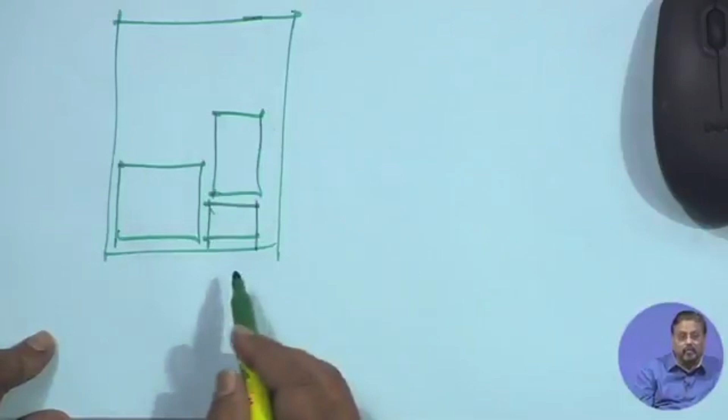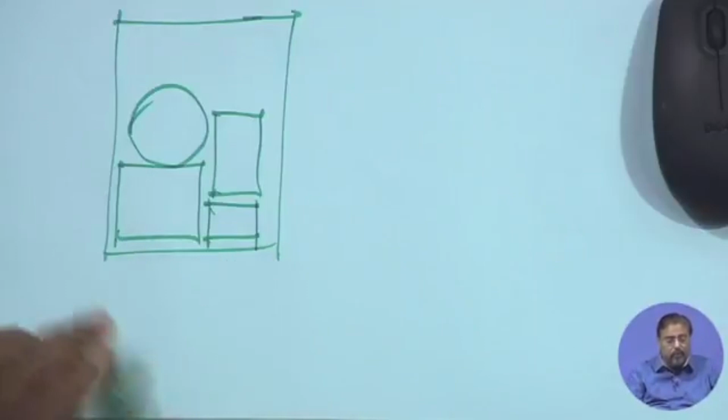It is something like, again, I will try to draw. Suppose in the whole landscape site, you have one area which is very large, and another space which is very small, and a space which is rectilinear like this, and a space which is circular. I am trying to give different kinds of forms to make my point clear. Whenever you see this, you have a feeling that they are not properly balanced in terms of their sizes. Again, the balance here I may not discuss in terms of the form and the objects.

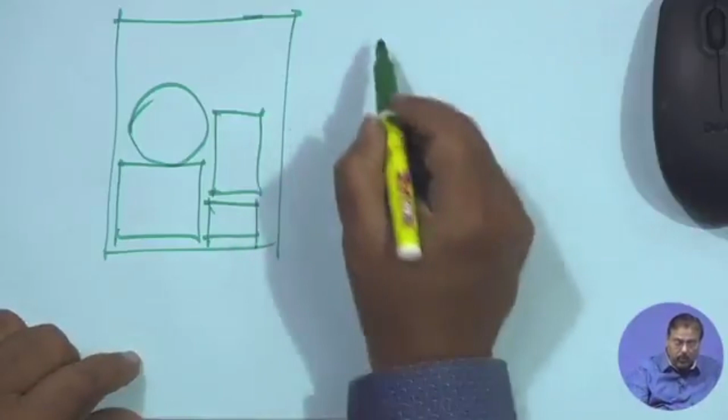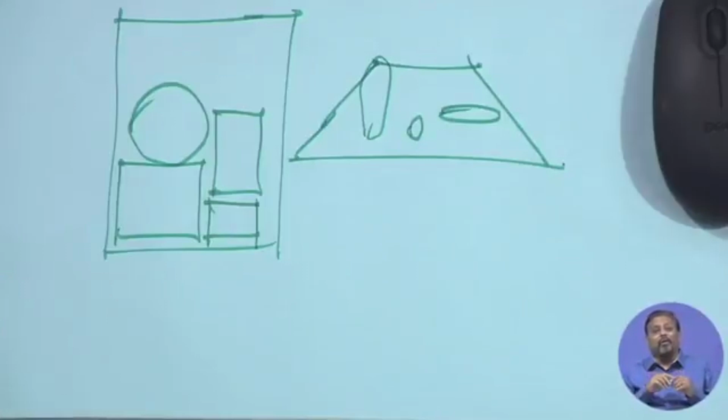Even the balance, say in my landscape, if I have a landscape drawn in perspective, I have one object very large, another object small, another prostrate kind - they are not balanced. Why are they not balanced? Because whenever you are looking at each of them and ultimately trying to make a comprehensive or cumulative idea in your mind, you find one is great, one is big, one is large, one is small, one is drooping.

This is what is the balance part of it. When we think it is balanced, every element is different, but in terms of scale, form, color, and harmony, they fairly appear to be in place. We did not put this as abstract, because here the mind starts setting some dimensions to it - that is why it is not abstract. Abstract are those which are non-dimensional, but here it has some dimension in it.

The occult balance is where there is a little bit of deviation from the normal balance you have done, but yet the effect has been very good. The balance is when the mind tries to understand whether everything is balanced and feels pleasure. Occult balance is not everything being balanced - it's slightly differing or deviating from the balance, but still looking good. This is where occult balance should be construed.

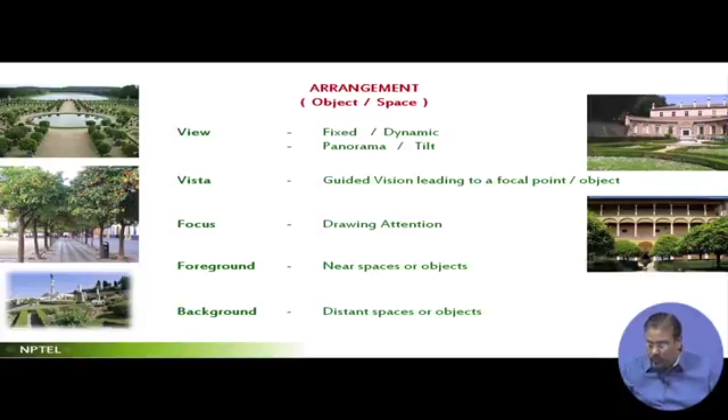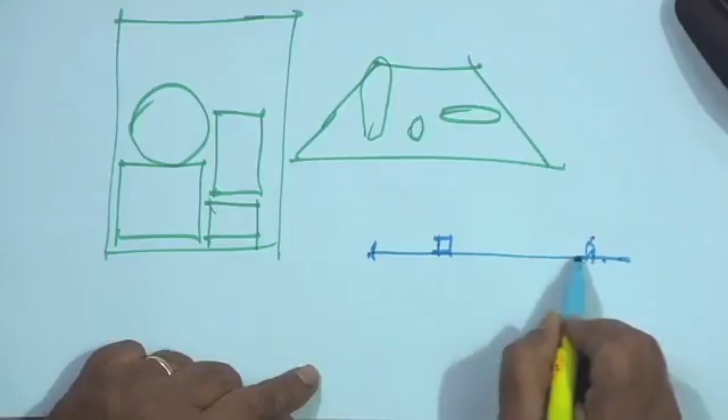One is foreground. Foreground is the near space from an object. Let me give an example with respect to this sketch. Please look at my paper, I am drawing a section first. Suppose you are standing here and you have an object here, with your property from here to here. Anything at the back which you are seeing in the picture, with the horizon line and this object, is what you are seeing.

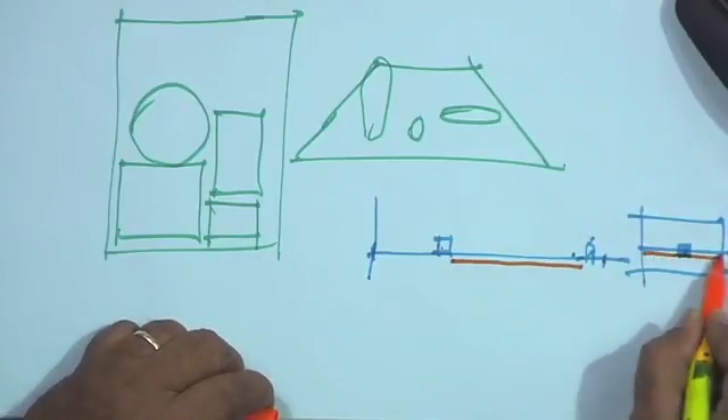This zone towards the front, this zone, is the foreground, and this zone at the back is the background. Now, interestingly, in a view frame, when you look at it, you will find there is a foreground and a background, and everything has a foreground and a background.

Foreground has a limit of visibility; it starts from a reference object to yourself. This portion is the foreground, starting from the reference object. If you shift to another reference object, foreground does not include anything behind you, never. But background is very interesting.

Background starts from the reference object and goes backward. Where does it limit to? The horizon. This is the real challenge in our landscape design.

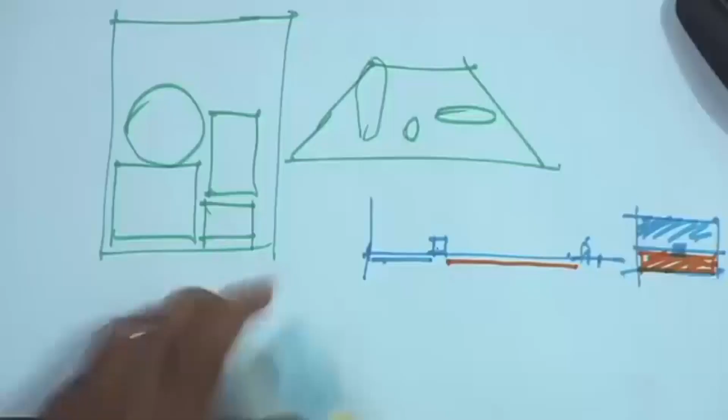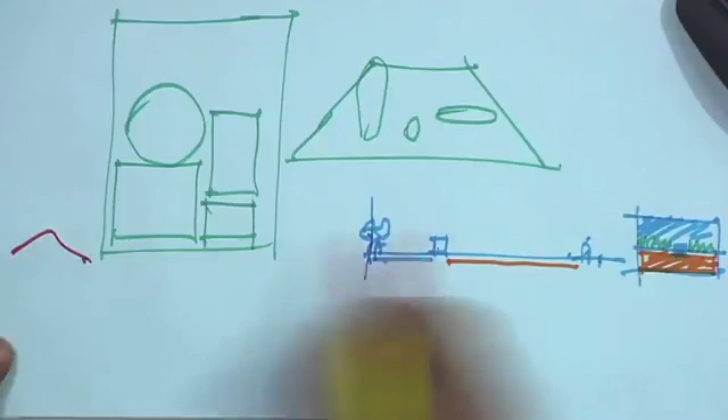Here I have drawn a line. Let's say I did not give any barricade or fence here, it is open. I have given some trees over here. When I see this, I will see the trees in my picture, but has it stopped my vision of the cloud or sky behind? No. Has it stopped the vision of something far away, several kilometers away, like a hill? No. This is the real interesting part of foreground and background.

Let me reiterate: standing from a particular point, as an observer, take a reference object. From that object to yourself is the foreground, not behind you. From that object, anything behind is the background till the horizon, and that makes sense.

All objects, every space or object, when you are viewing it, you are always seeing it against some background, and you don't have much control over the background.

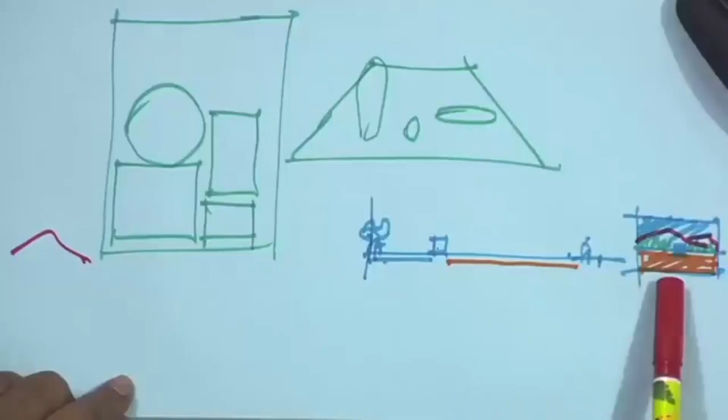Example, the sky. Look at this picture on my paper, a very simple picture. This sky, when it is not cloudy, very shining, then anything you see in front is again a shining background. When it is very cloudy, it's a gray background. When there are cumulonimbus clouds, it's a very dark gray background. If you find blue sky with sporadic white clouds, that's a different background.

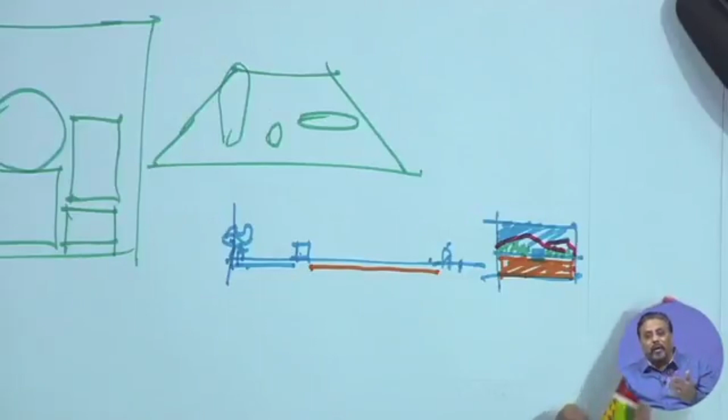So your background is always beyond your control, and that contributes greatly to the expression or experience of your project site, but yet you do not have any control over it.

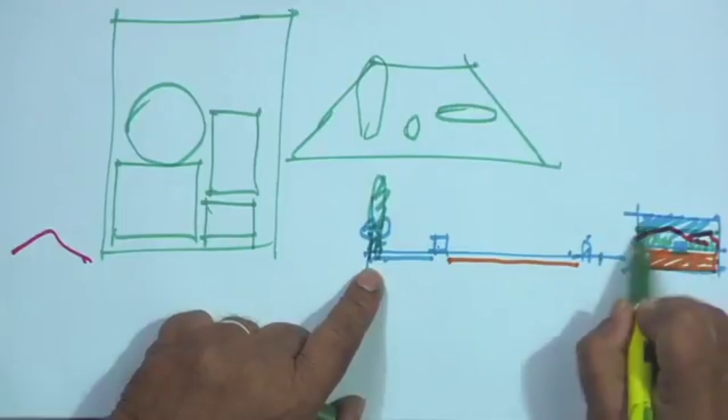If you really want to control it, you can raise the vertical limits up to a height so that the object you have planned at the backdrop negates the effect of the rest. For example, if you make tall tree groves at the end, such that standing at this point you almost do not have visibility of the hill at the back, you have stopped it.

That is where you can do such things, but there is a limit. Up to what height can you go for the tree, or how do you really work it out?

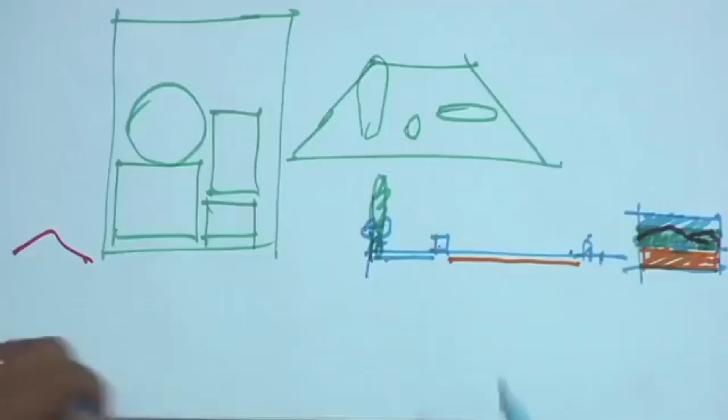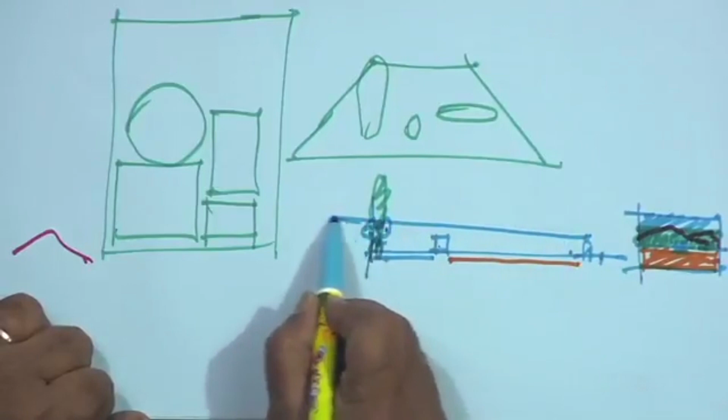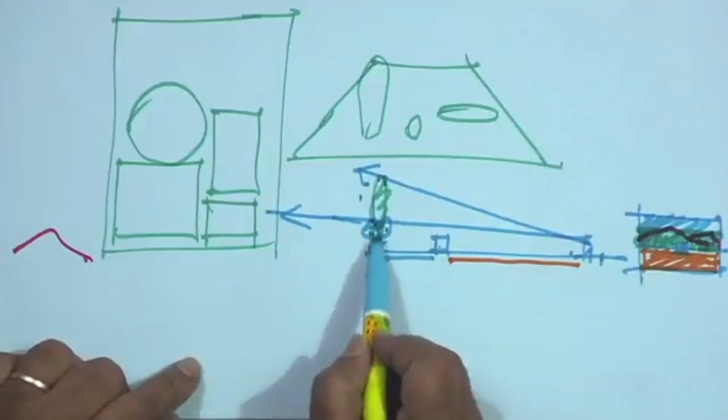A very interesting way of working on this: take this particular line and whatever backdrop object you have, draw a line like this. If the object at the back has very different scales, and if it's visible between this and this point in your picture, it should be included. You decide this height based on your view line. Stand at this particular point, raise the view line up till it reaches the tip of that obstruction, and beyond this, whatever it is, I do not see.

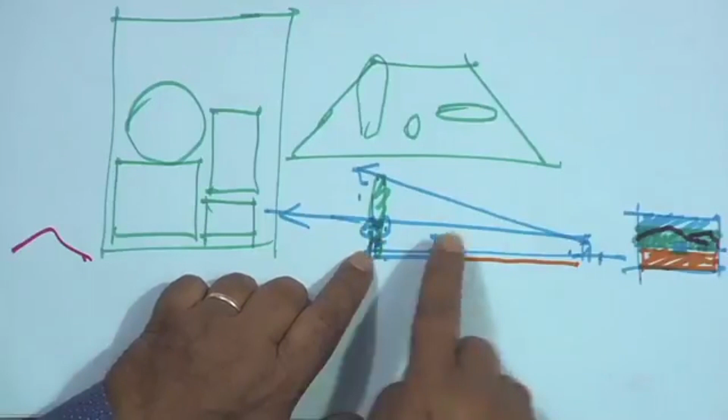That is how you can make a backdrop as per your own choice, but otherwise I always prefer one thing in my landscape. First, I will not go into this kind of complex design. I will first try to see whatever is at the backdrop and exploit it, explore it. If the backdrop becomes good, I will do very little here and allow this object to be seen against that background. So background planning and foreground planning are very essential exercises the landscapist has to do.

If you go back to French and other landscape designs, when I discuss this I will go to a panel, a series of palette of pictures. All these discussions I am doing are just to express what I would like you to know. When I go to a palette of pictures, there will be multiple pictures in the same slide, and I will try to say this is what it is, this is where it is, this is what it is.

Next, order, sequence and transition. This particular set I have clustered together for a very definite reason. When you are arranging your spaces and allowing a user to experience it, these three things matter a lot. Order is placement, how you place it. Sequence is exposure, how you make the movement expose through movement. Transition is exposure from one to the other.

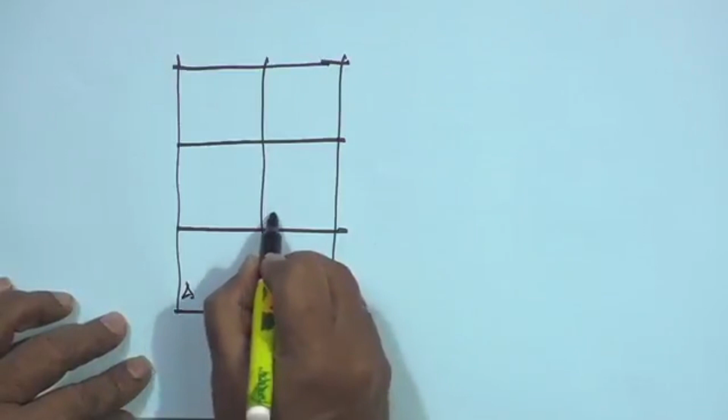Let me draw one sketch. This is a schematic diagram to give the idea. I'll draw a very simple diagram: Zone A, B, C, D, E and F. Say this is a landscape project I am designing, divided into six segments. In terms of a French landscape example, six parterres: A, B, C, D, E, F. For discussion's sake, let me add some conditions. The arrangement or treatment of A is not the same as B. Rather, each of them has their unique arrangement and components. This is what order is. I have ordered them as is, and the order is regular, very regular.

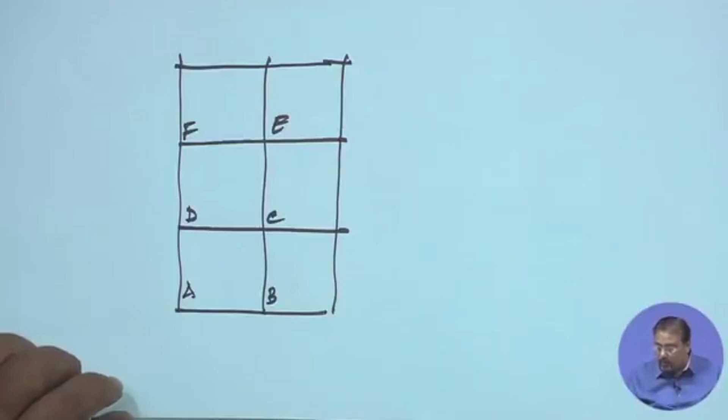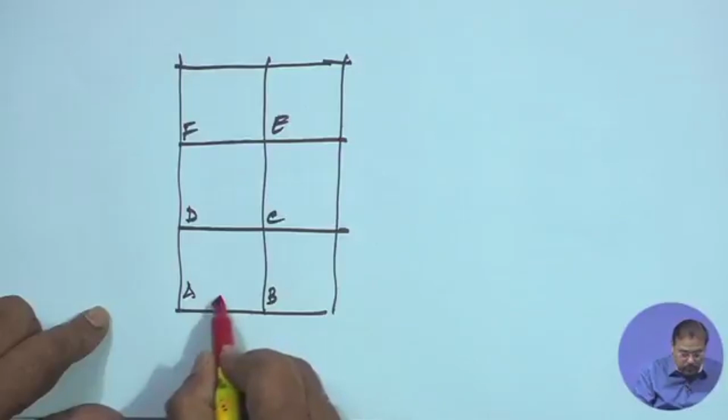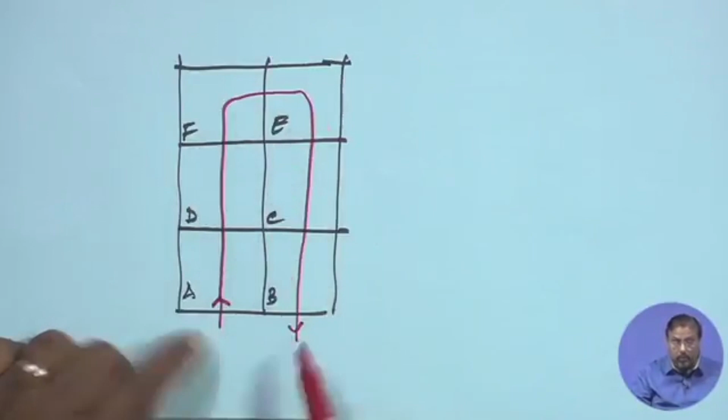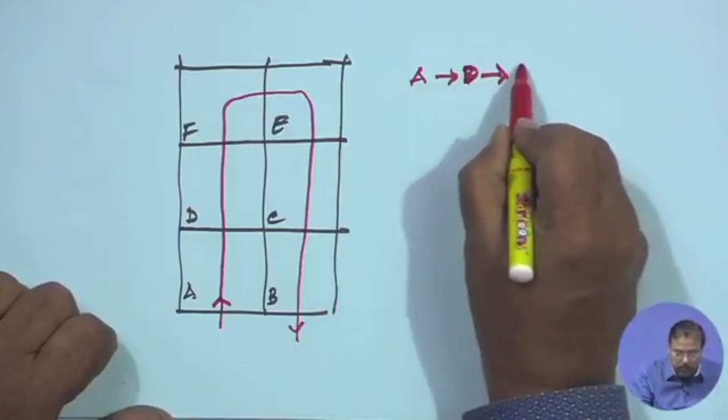Then comes the question of how to see it. Here lies one point: when somebody is seeing it, I will force him to see the way I want. Make him enter and follow these lines. A viewer enters from here, goes to the next, to the next, to the next, to the next, to the next, and then ultimately comes out. If I record this, I have, as per design, sequenced it as A, then D, then F, then E, then C, then B. Be attentive to this.

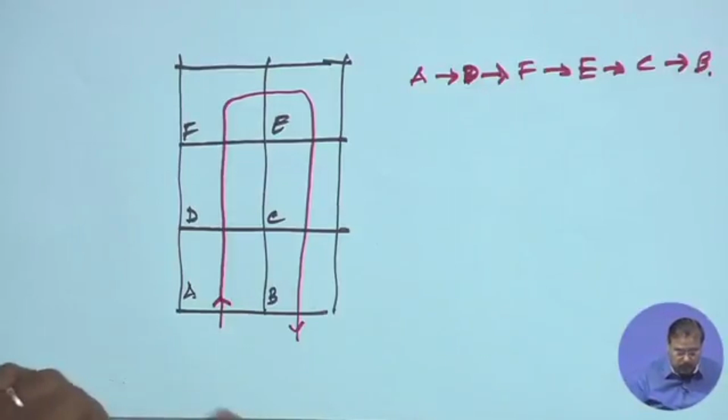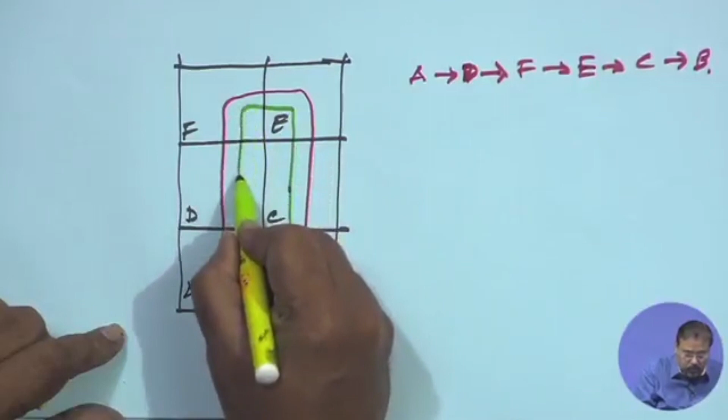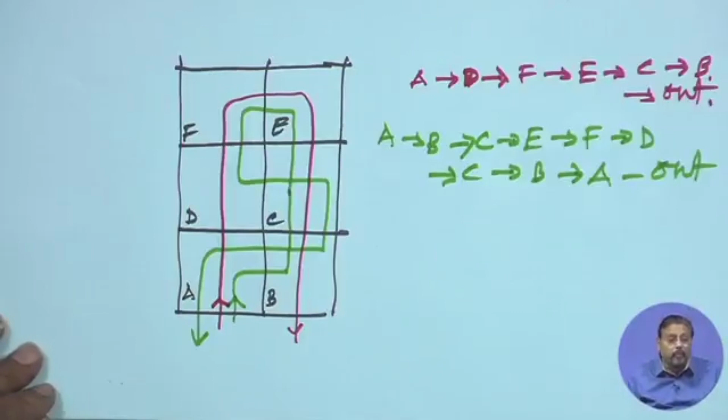This matters - look at this. He enters from here, goes to A, looks at this, then goes forward. Same kinesthetic experience, knows nothing about B. Goes to D, experiences it, goes further, experiences this, turns, experiences this edge, then goes to E, experiences this edge, then comes to C, turns, experiences the E, comes to C, experiences this, then comes to B, and then after that, out.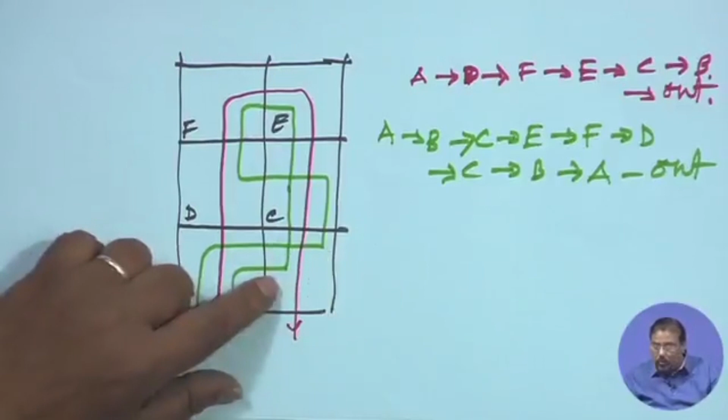Next option, green one, goes to A. A experiences this entirety, turns to this, sees this, goes to this part, sees this, then goes to this part, experiences this, goes straight, experiences C, then E, experiences this, then turns left, experiences this, then F, turns in this direction, experiences this, comes here, experiences this, turns to the left, sees this, then to C, this one, then to B, this one, then back to A, seeing this.

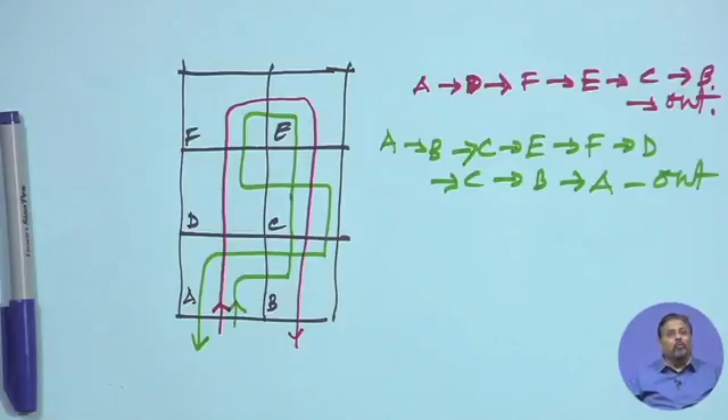Now, this picture, if you just download whatever sketch I have drawn, and try to put your figures, objects and elements within it, try to see, will you have the same experience? No, absolutely different experience you will have. I will tell you how it is different.

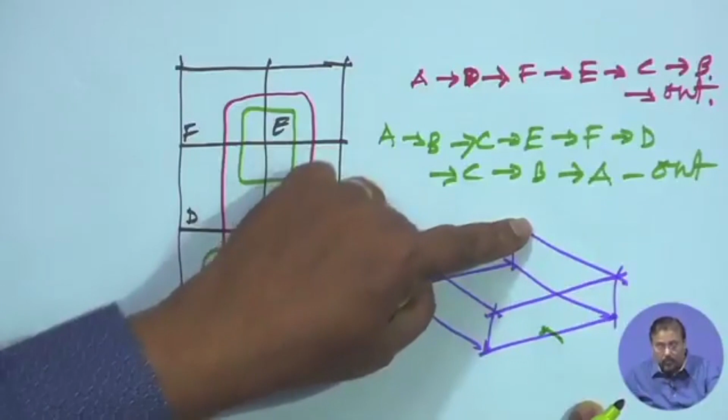See, first of all, in a space, I am drawing it in 3D. Try to understand this, and then when you mentally work it out, try to follow these rules. Once you have come into this particular point, when you see this, you are seeing the rest of the things. You are seeing the other two sides as the side view, and the frontal view of this as the front view, side view and front view.

If you go farther forward, this you have never seen in detail. Also, you have never seen this in detail. You came straight from here to enter through this. After that, when you go straight forward - I am talking about the red line - you saw these two lines as a perspective view, never a perpendicular view, and this one as a perpendicular object, a perpendicular wall. Whatever treatment it is there, this is registered, the other two remain registered.

Take the example of the Granada or Spanish landscape. You remember that fountain? On the left hand side we have the arcades, on the right hand side we have the vegetation, in the front we have the baradari or the king's palace, and then in front you have the water and the fountains. Just take that particular picture - if you would have been looking from this to the arcades, you would have seen the total arcades. You would have lost the effect of the baradari and the entry, and of course the vegetation. This is how you look at it.

So, when you go into this, if you could count or register or record the experiences of the person, you would see that A to D to F to E to C to B is one experience. Take a cumulative experience - this, when you finally add it up, somebody will express in some manner. Then, if you take the red one, A to B, and the green one, A to B to C to E to F to D to C to B to A - cumulative. A he has entered twice, C he has entered twice, B he has entered twice, but he is looking in a different direction. Since he is looking in a different direction, reaction is also different, registration is also different, retrieval is also different. So when it differs so much, his cumulative reactions to the entire spaces are different.

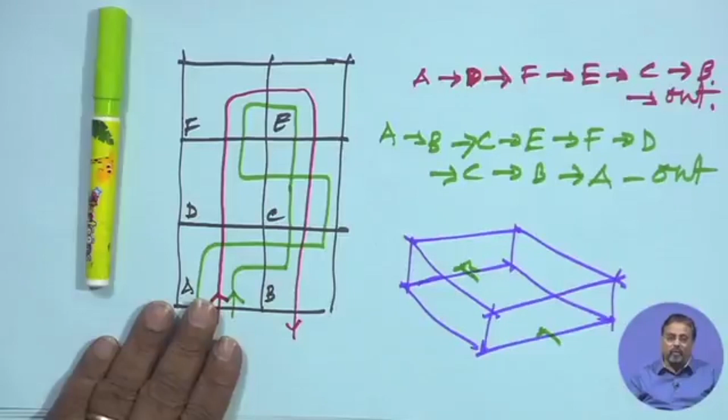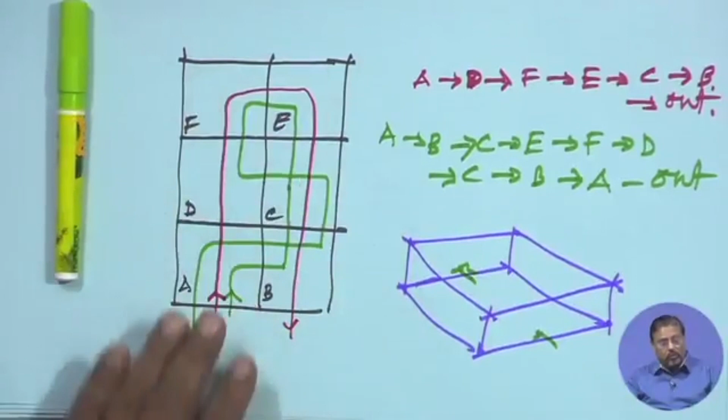Enjoy it. Meanwhile, draw this picture on your piece of paper. My advice is to draw this picture and try to put elements by yourself. I have just given you the concept. Try to put the elements yourself, and the suggestion is to make different kinds of elements in different zones. Do not repeat the same elements, do not repeat the same arrangements, and then follow the same sequence - A, D, F, E, C, B, A, B, C, E, F, D, C, B, A. Follow the same sequence I have given, and then try to comprehend and write in your forum what you felt about it.